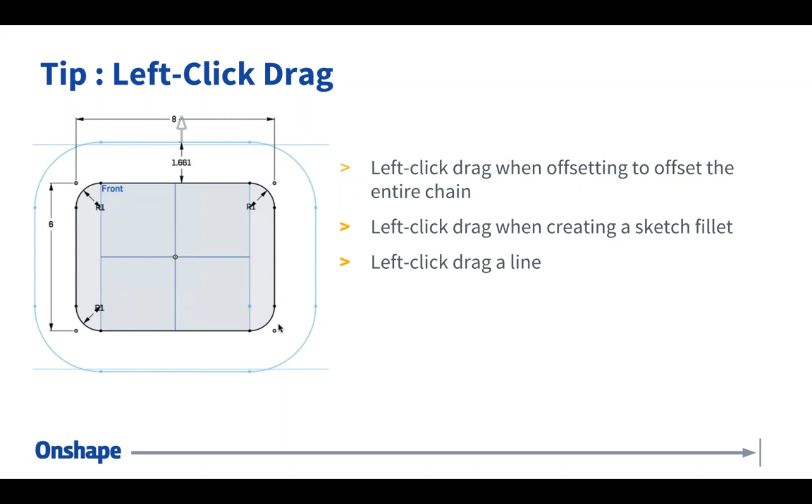So again, the left-click drag is a technique that you'll use in a few different commands. I'm going to show you an example of a few of them here. Let's jump out of this—I'm going to get into a document, and let's edit a sketch.

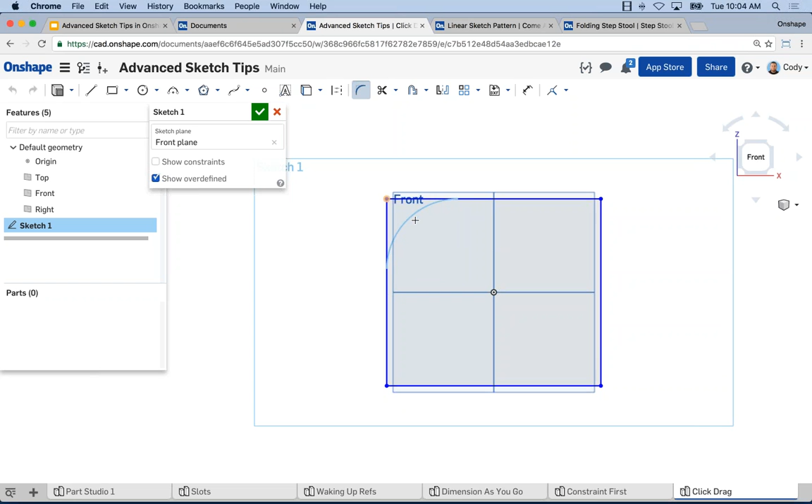One of the first things I want to mention is left-click drag as it applies to a sketch fillet. If I select the sketch fillet command from the toolbar, if you're familiar with sketch fillet, it's very easy—you can just left-click a point, enter a value for your radius, and it creates a sketch fillet. What a lot of users aren't aware of is that you can left-click drag a point and dynamically resize that sketch fillet. So instead of left-clicking the point, left-click drag the point, and you'll get a dynamically resizing fillet. It's a great way to get it close to the size you want, let go, and then enter a value—let's say 2. So then I can enter a value, and I have my sketch fillet.

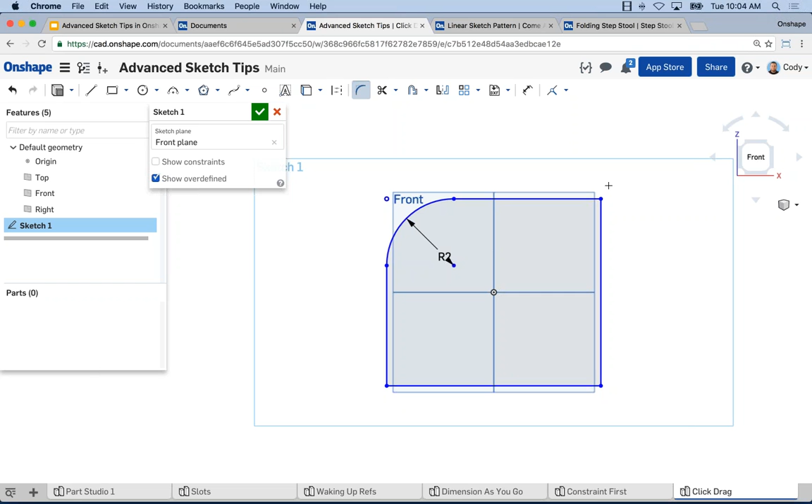The main tip here is instead of left-clicking the point, you left-click drag the point, and you get that dynamic resize. Now, another sketch fillet tip is that while in the sketch fillet command, after I've placed that first one, I can continue clicking on points, and it will continue adding fillets at that radius.

So it's very easy for me to add one radius, and then I know that all these other points also need fillets, and they're all the same size. I can just continue clicking points. It's easy for me to go in and add the fillets. They're all tied to each other, so if I change the dimension of one, they all update. But it's just a very convenient way of adding a lot of sketch fillets of the same size at once.

All right, so left-click drag is, again, the big tip. When you left-click drag a point, you get that dynamic resizing sketch fillet. Another example of this is left-click drag in the offset command. So let me take a moment to explain how this works. Let's say, for instance, I wanted to offset all of these lines and arcs, create an offset of the entire chain of sketch entities that I have here.

If I select offset and then just left click an individual piece of sketch geometry, I get an offset of just that one piece of sketch geometry. So it's useful if that's all I wanted, or maybe I just want one or two pieces of sketch geometry, I can offset just those individually. But what if I want dozens of lines and arcs that are all connected, and I want to offset them all at once? I don't want to left click each individual entity, or I don't want to window select or do any of those types of techniques.

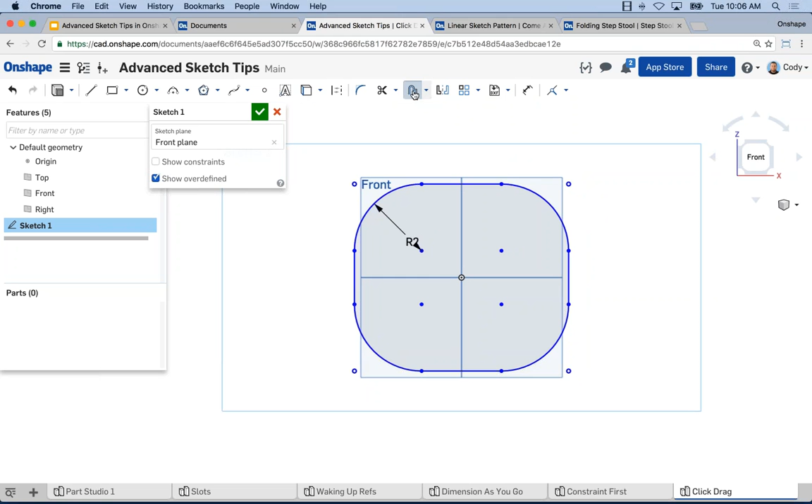What I'd recommend is left click drag. So there's another example where left click drag makes a big difference. So I select offset. I'm not going to just left click. I'm going to left click drag the entity, and it will automatically grab the entire chain of entities. Again, really useful if you have a lot of geometry that you want to offset at once.

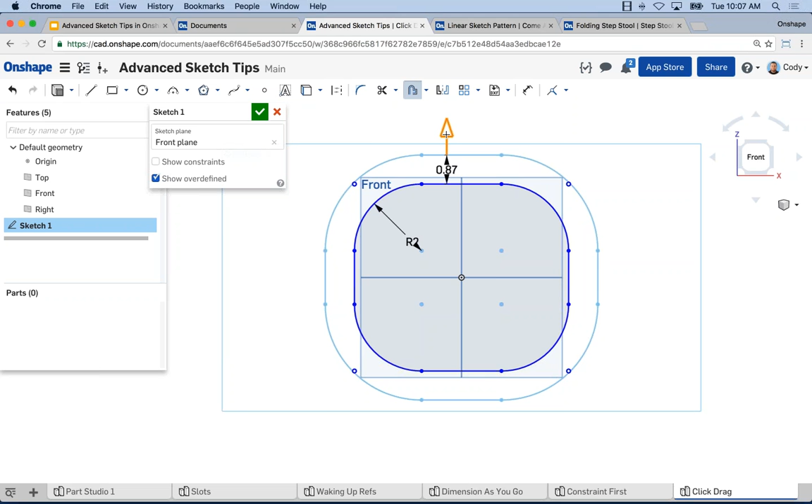You don't want to have to window select or left click individually the pieces. Just left click drag one piece and it will automatically grab everything that's connected. So again, left click drag. This is another example where it can be particularly useful in the offset command.

Now, the other thing that I mentioned is sketching a line. And this is a simple one, admittedly. So, for those users that have been around a long time, I'm sure you're familiar with it. But I do want to mention it just briefly. In the line command, if I select a line, if I left click and left click, I, of course, get a line. And by default, it assumes that I want to continue sketching lines.

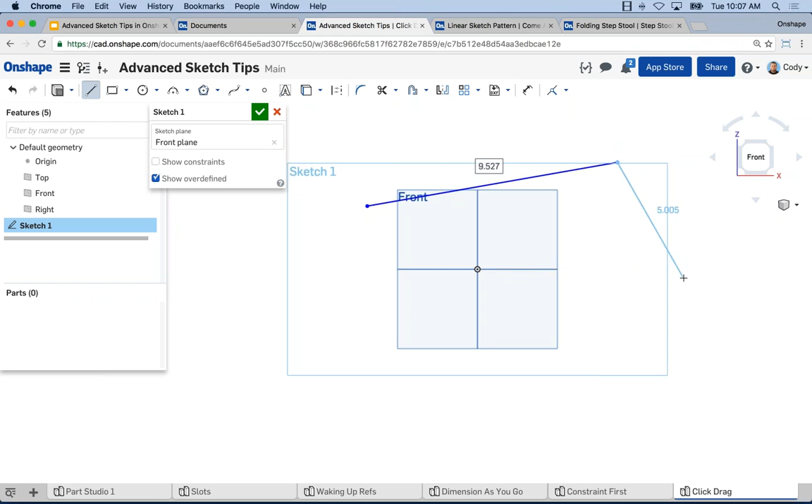And I'm sure users out there are familiar with this functionality. Once you've sketched a few lines, if you left click, it just continues with the line. It makes it easy for me to go on to the next one and to the next one and so on. So if I left click, just like I did, it assumes that I want to continue sketching lines. But what if I only want to sketch one line? And this is another example where left click drag is very useful.

So I select line. Rather than two left clicks, I left click, drag my mouse to where I want the line to end, and let go. Okay, so I'm using a left click drag to move the line out to its position. The benefit of this, and it all depends on the scenario, but it does not assume that you want to sketch another line. So if all you're trying to do is draw maybe just a series of single lines that are not connected to each other, this might be another technique that's useful. Okay, again, left click drag instead of two separate left clicks in the line command.

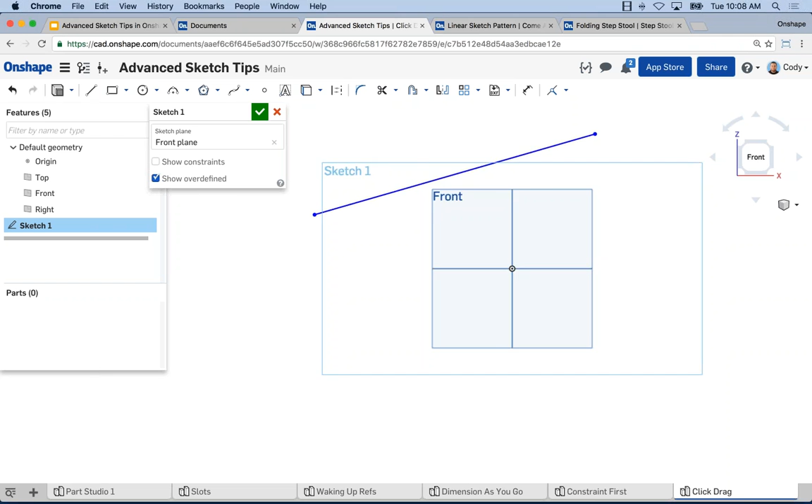All right, so that's my first tip, and that is left click drag. You can use it in the offset command, sketch fillet command. Dragging a line is another good example of it. So a very useful one. The next one on the list is linear patterns, and I don't want to discuss just linear patterns. We have other webinars that discuss patterns and sketch patterns in particular in greater detail.

What I do want to discuss is the flexibility of the linear pattern command, because I think it allows you to do a lot of things that users may not be immediately familiar with. So the thing I want to stress is you can create a pattern of sketch geometry very easily, but you can also edit that pattern very easily.

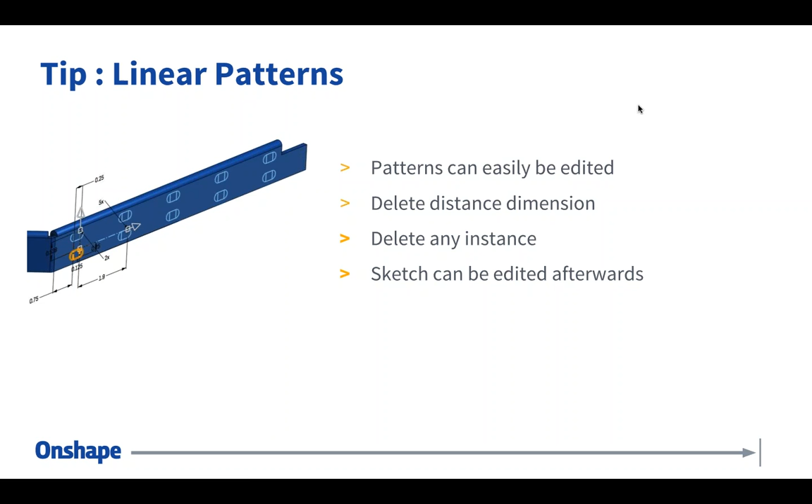And what I mean by that is you can delete instances within the pattern. You can delete the dimension that drives the pattern and redimension it to something else. And in all of these scenarios, the pattern remains intact. So you can think of the sketch pattern as creating all this geometry, but it's a very flexible pattern that can be modified later. So let me show you what I mean by this. Let me jump out of this and get into an example here.

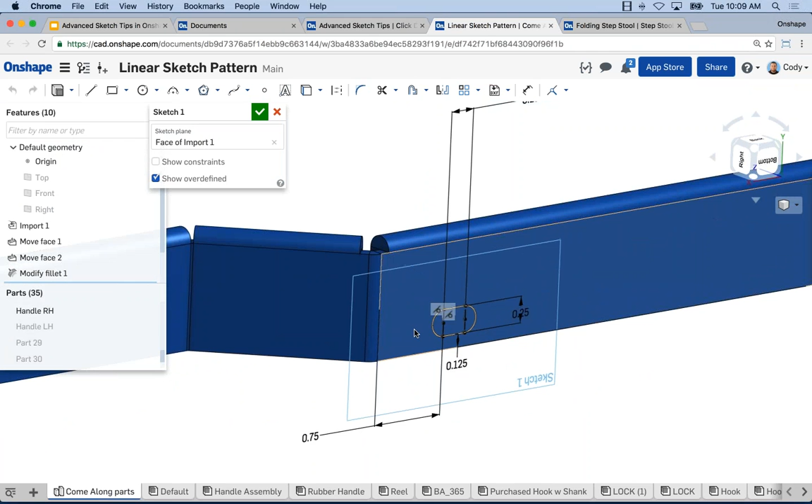So in this example, I have a simple arm to a part, and you can see I have this slot sketch, right? Sketch 1 here. You can see I have a simple slot feature. And what I'd like to do is create a linear pattern along the edge of the part here of this sketch geometry. Now, if you haven't created a linear pattern of sketch geometry before, it's very simple.

You click the linear pattern command in the toolbar, and you select the geometry that you want to pattern. So I just window selected that slot. And so you can see it now gives me my pattern. Here are my two pattern instances out here in space, and I have these arrows and manipulators that I can grab and drag. In my case, I want to pattern this direction, so we're going to grab the arrow and drag it the other way.

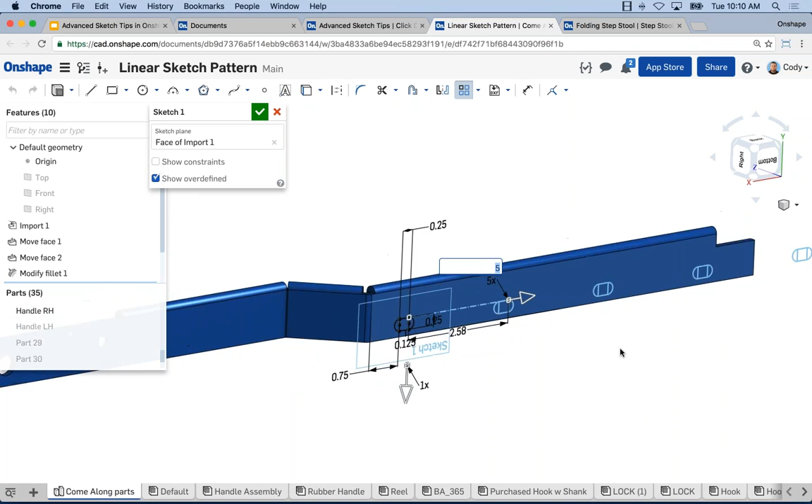And I actually want, let's say, 5 instances. Right, so I'm going to say 5x. I just double click the number. Now I have 5 instances of my pattern. Let's change the spacing a bit here. We'll pull this back a bit. There we go. And now I have 5 instances of my pattern, of my sketch geometry.

Now, the linear sketch pattern command can also go in 2 directions, so I can left click the other arrow, drag it, and you can see that will add a second direction to my pattern. And you can go multiple instances of this as well. You can see this is 2x, but I could easily go 3 and 4, whatever I want in terms of pattern geometry. So this is the second direction.

In this case, you have the same details. The distance between pattern instances is a dimension here, and the number of instances is a dimension, right? So just keep in mind, when you're doing this, you have all the same controls that you might get if you were to put these together manually. Now, one thing I want to stress, though, is once you've accepted it, it's not done. You can go back and change things.

One last thing before I forget. You can also move these squares. So say, for instance, I wanted the pattern to follow an edge that's not normal to a part. I can grab this and drag it up. Right, I can align this line with some reference, some other piece of the model, right? So I can create a relationship.

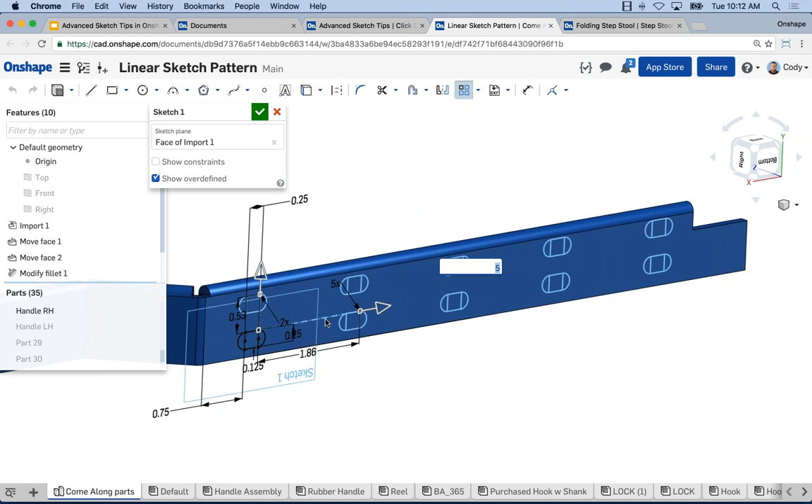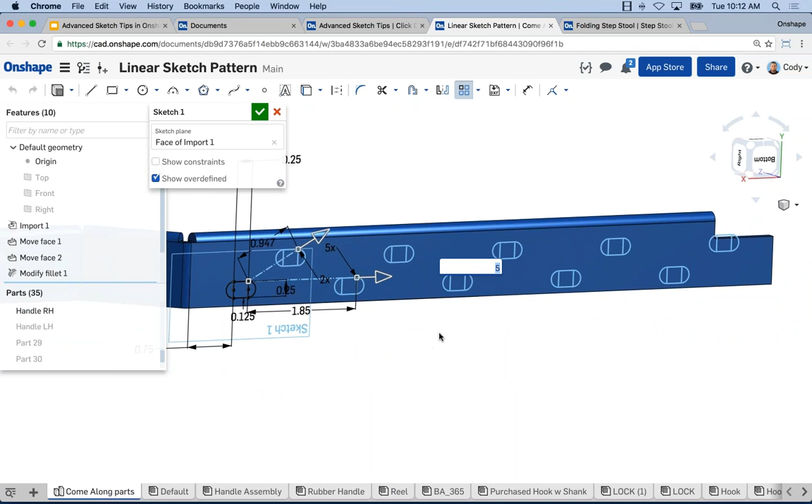Now, I think what most users will do is they will get the pattern close, like I've done here. It's not perfect. This needs to be perfectly horizontal, and so on. Maybe I want these evenly spaced between the 2 instances on top, something like that. But I know it's not done. The important thing is make sure to accept the pattern, right? You can use the Enter key to accomplish it, or the left click.

Again, left click the mouse. You can see the little visual cue there. Then you've accepted your pattern. But again, trying to drive this home, you can then change it any way you'd like. Right? Just because you've accepted the pattern doesn't mean that it's finished. And this means I can delete individual instances.

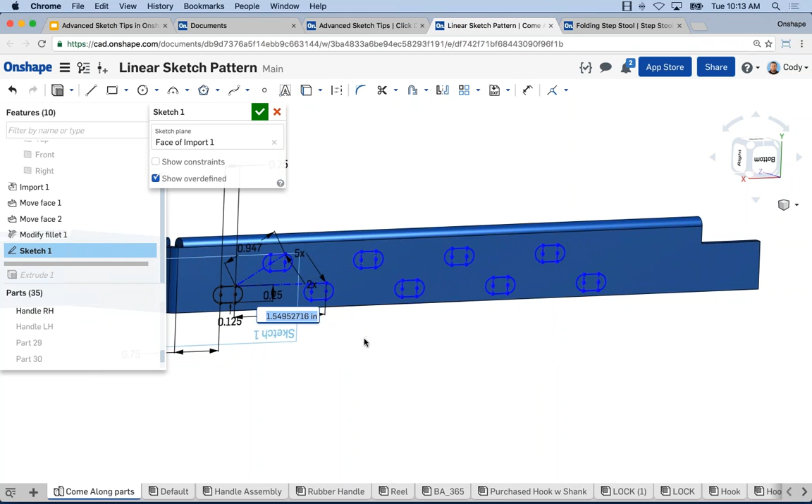I can window select this one in the corner and say delete that. Right? And now I've deleted one instance. It doesn't impact anything in the geometry. So if I change anything in the pattern, everything updates. So just keep in mind that deleting individual pattern instances doesn't have an impact. You can also change the construction lines that drive the geometry, right?

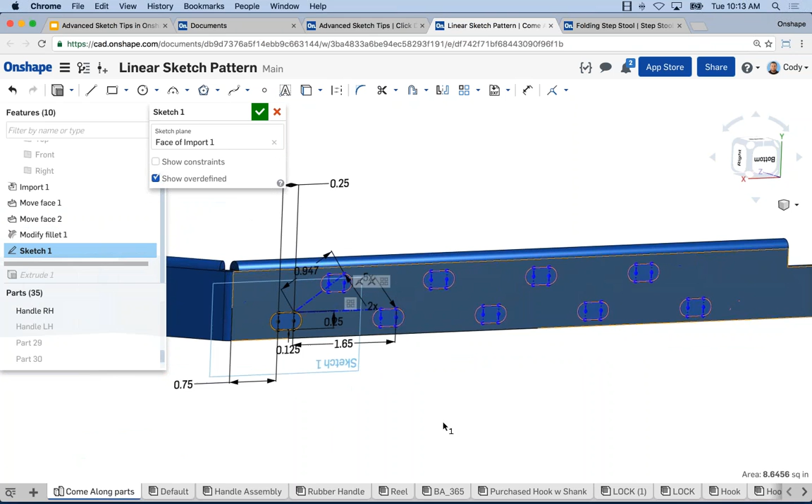So I can grab the end point of this line and move it, or add a dimension or constraint that ties it to something else. I can also make this edge, for instance, parallel with the line. Right? So that might be a great way to constrain my pattern.

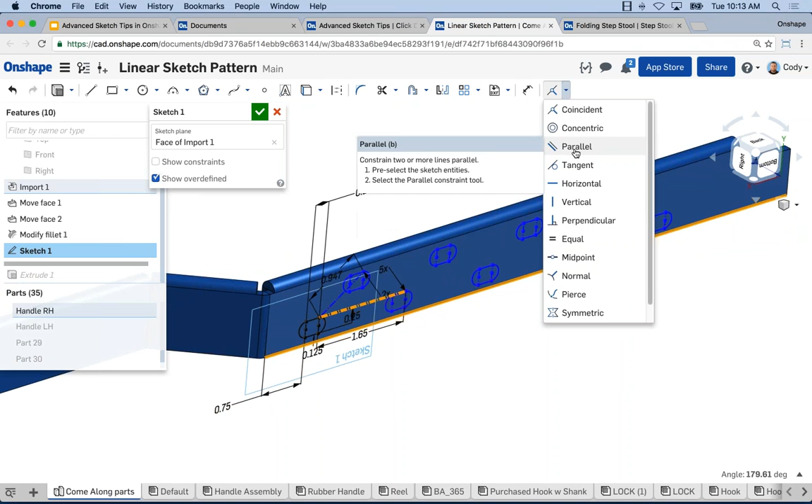Okay? So just keep in mind you have a lot of options when you talk about how patterns work. You can constrain it relative to other things. Essentially, it gives you the sketch geometry you need to then go in and make modifications. So now I've made this line parallel with the bottom edge, which means these slots are all parallel. And I can even come in and say, the pattern for this slot should be at a 35-degree angle, right? And so now I've fully defined my pattern.

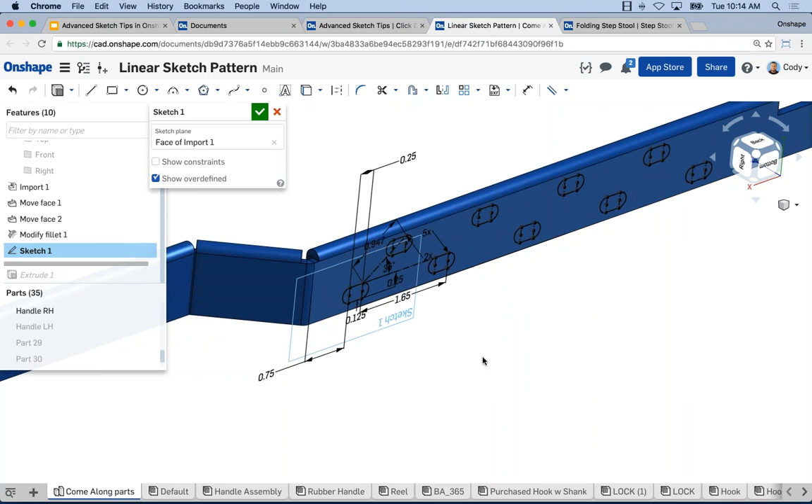Now, one other thing that I want to point out is that you don't have to drive a pattern by the distance between the individual instances. That's how it's going to default. So you'll notice I have a 1.65 dimension here, and I have another dimension for the distance, 0.947. This is how it will, by default, dimension, but you can change this. I can delete this dimension and dimension it from the edge, for example. And now, let's say 2.375.

Now, instead of being driven by a dumb value, so to speak, between the instances, just a static number, it's now driven by the length of this arm. So if I change the length of this arm, the pattern is going to behave in a little bit more intelligent manner than it otherwise would, right? Because now it's driven by the overall length rather than just some arbitrary number between instances.

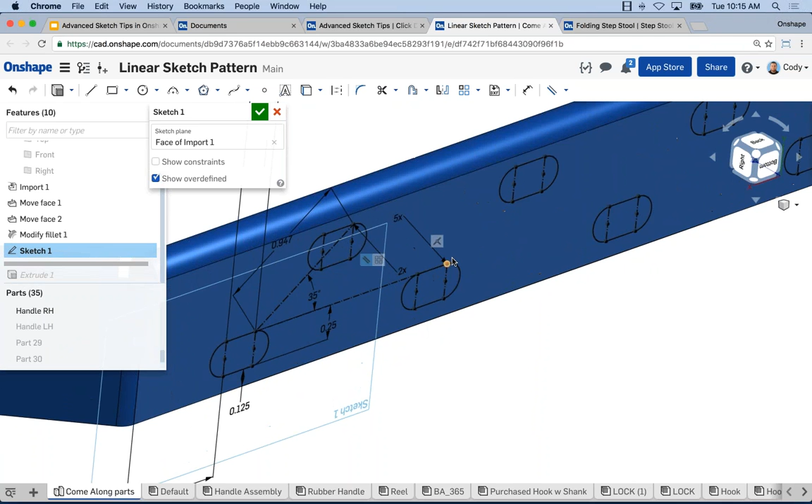So again, just driving home, you can delete the dimensions that drive the pattern. You can delete the individual instances of a pattern. You can dimension it just like normal sketch geometry. All those construction lines that are created can be defined just like normal sketch geometry after you've accepted the pattern. So again, the left click to accept the pattern is really kind of the first step, and then you go back and fully define things, especially in scenarios where you want the geometry to align with an edge of the part. You're going to need to constrain this line to something on your part in that example.

All right, so enough on this. I just want to drive home again the linear pattern command. I think that you may have exposure to it, but just realize it has a lot more capability than a lot of users are aware of.

All right, so I see a few questions. Was your arm made with Onshape's beta sheet metal tools? Somebody had to ask. No comment. I will say we are very, very close on sheet metal. So if you're interested in sheet metal, stay tuned.

Are there any plans for construction history for sketches, similar to construction history for parts? Of course, editing a sketch is a step in the history, but it's not individual pieces. I'm not aware of any plans to make it more granular than edit a sketch and change it. I don't know that you're going to see insert line, rectangle, those types of steps at that granular of a level.

Does a slot have a center feature to select? Usually I need to center the slot in 2 dimensions and then need to recalculate from the center radius. I'm fairly certain the answer is going to be no. I'm going to cover slots in just a second, but I think in your example, it's using some other geometry to reference for a slot. So give me a moment, and maybe I'll answer your question when I cover slots.

Can you replace the angle dimension in the pattern with an XY offset? Absolutely. Yeah, that's just a preference in how you like to dimension. Sure. How would you do a cutout on a cylinder? A few different ways. Create a plane in the middle of the cylinder and cut from the middle. It depends on the scenario.

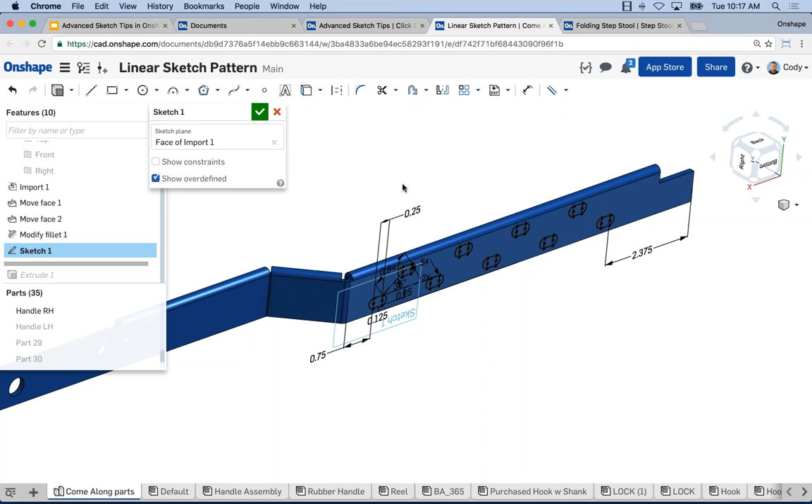Can patterns be dynamic? As the part length increases or decreases, can pattern instances increase or decrease? And the answer is yes, but it requires some thought. And what I mean by that is there's an example of it. If you do a lot of this, I want the number of pattern instances to dynamically increase based on the length of a part, and I want that to be automatic.

What I'd recommend is on the FeatureScript page, onshape.com/featurescript, there is a feature. Forgive me, it's been a while since I've looked this up, so I'm going to have to remember. I forget now which one it is.

But there is a feature here that will recognize the distance between them and automatically increment. Measure distance. This is the one. So definitely check out the measure distance. There's an example of it working there.

You can copy it. It's a public open document. But measure distance would do what you're looking for in a smart way. It would allow you to intelligently update the number of instances based on the length of a part, for example. Okay.

In this example, the example I was giving you a moment ago, the sketch pattern example, I can drive it by the overall length, of course, but I can't say, if it's this, then set the instance count to this. The spacing would change, but not the instance count. Is there a way to get the instance count to be driven? First and last instances are defined by the dimension, and in between it changes instance count.

The first thing I would try there, and forgive me, I haven't personally tried this, but a variable. I haven't tried driving a linear pattern instance count by a variable. That would be the first thing that I would try. And then you'd have to establish that the variable itself is driven by maybe the length of the part or whatever factors that you may have. But that would be my first guess, first thing I would go for.

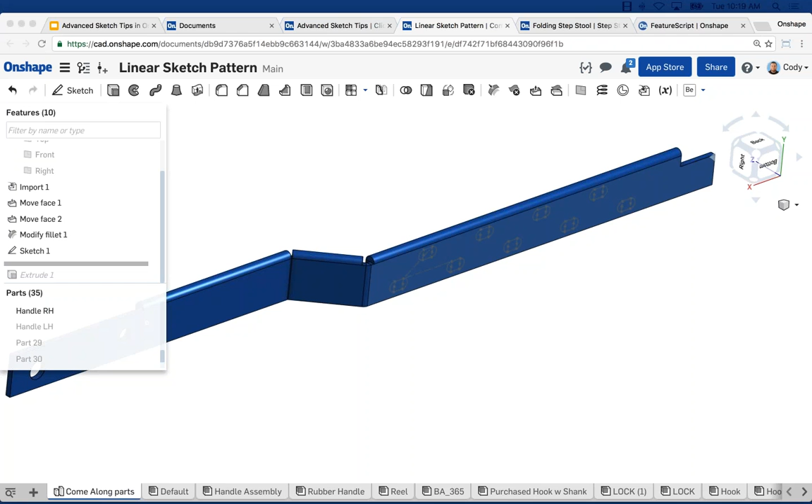All right, moving on. The next tip that I have for you is select constraint first. And this one's a big one if you find yourself adding a lot of the same constraints over and over again. So let's say that I have this sketch and I need to add 5 tangent constraints, and what a lot of users will do is they'll select the geometry, and then click tangent. Geometry, then click tangent. And so you end up clicking tangent 5 times every time that you create a constraint.

So if you know that you're going to create a lot of the same constraint over and over again, a big tip that I have is you can click the constraint first, then click the entities that you want to constrain. And this just means you don't have to go back to the toolbar every time. The command will remain active until you get out of it, until you click the command again or hit the escape key. So the big thing is it's very useful if you create a lot of the same constraint back to back, because you don't have to go back and forth.

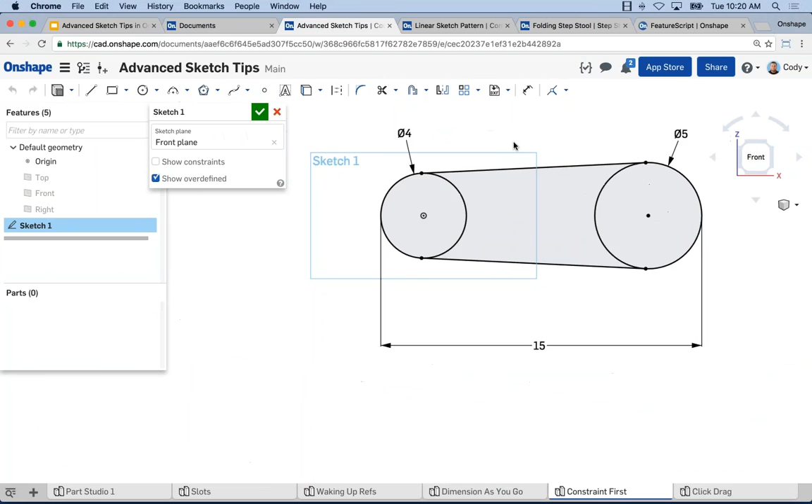So let me give you a simple example of this. Let's say I had a situation like this one. And in this situation, I have, actually, you know what? This is defined. Let's create something real simple, right? So I have two circles and I have two lines that join them. And what I really want from these two lines is I want tangent. I want all of them to be tangent.

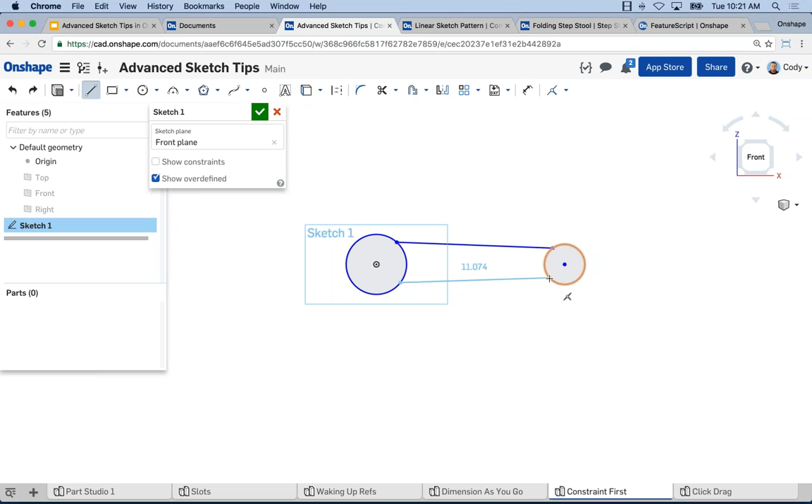Now, if you're particularly careful, you can actually create the tangency as you're sketching, but let's just say that you haven't and you need to create a tangent constraint between all four transitions, right? Four different tangencies between circle and line, all 4 points need to be tangent. What a lot of users will do is they will left click, select tangent from the toolbar, left click, select tangent, left click, select tangent. So I'm going back and forth to the toolbar.

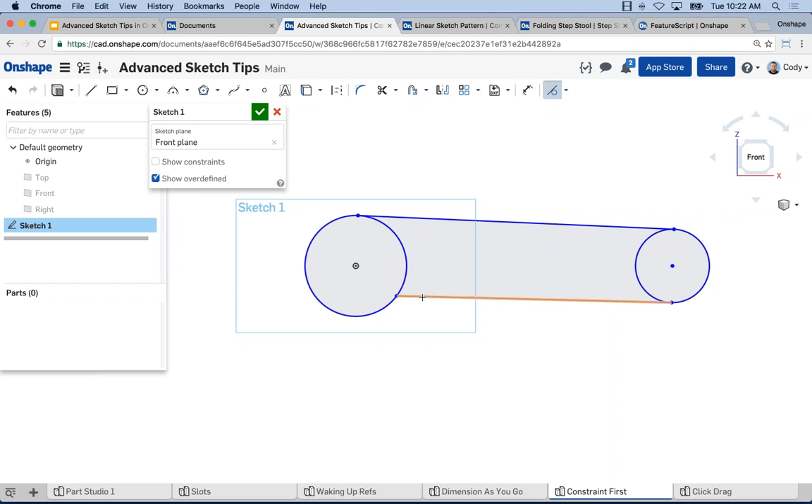So the big tip that I have is click the command first, then click on the entities that you want to constrain. So now I have the tangent command active. Now I can go line, circle, line, circle, line, circle, line, circle. And now I have 4 tangent constraints without having to go back to the toolbar every time to select it. So just keep in mind, it's a big time saver if you find yourself having to do it a lot.

And I think for a lot of users, if you do lay out all of your sketch entities all at once and then come back and add all your constraints at once, this is a very valid tip. You'll find yourself having to go back and forth a lot.

Question, can you do angular patterns? Yes, we refer to them as circular patterns. You can do circular patterns in Onshape.

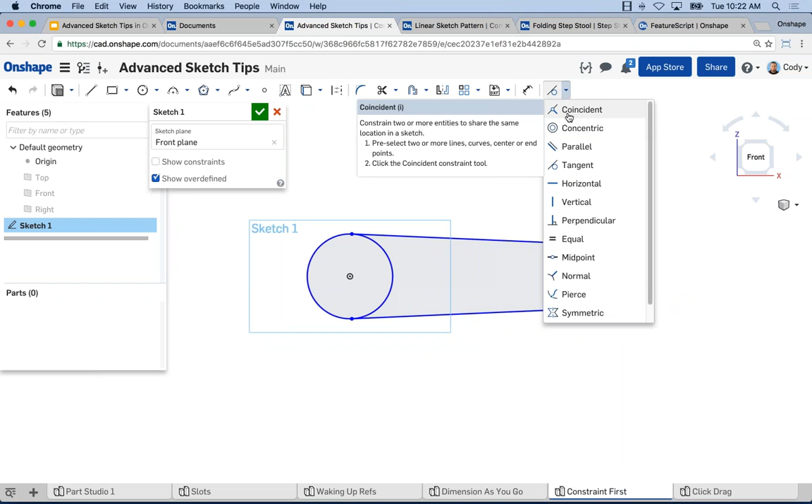All right, so that is my next tip, and that is just selecting your constraint first. And it's not specific to tangent, of course. Any constraint, you can click on it first and then select the entities that you want to constrain. It's a little bit different than what a lot of users do, but I think if you're doing them back to back, it becomes very valuable.

The other tip is remember that you're in that command until you escape out of it or click on it again. So it will assume that anything that you click on from that point forward, you're trying to make that constraint. All right, so that is one that will save you some time when creating constraints. Let's move on to the next one.

Now, the next tip, I think, has been around in CAD a long, long time. So this is not a new thing by any stretch of the imagination, but it's a commonly asked question, especially by the more heavy sketching users out there. And that is, how does window select work? When I have a lot of sketch geometry, does it make a difference if I go from right to left or left to right? And this is something that carries over from a lot of CAD applications.

So if you're not familiar with what I'm referring to, I'll explain it in a second. But if you've come from AutoCAD or SolidWorks or one of those kinds of CAD applications, this is a familiar concept. When you're in a sketch and you need to select a lot of things at once, I don't want to left-click individually lines. I want to window select maybe a dozen lines and arcs without having to left-click individually. That's where window select comes in.

It's essentially a left-click drag. So you left-click drag your cursor over the sketch geometry that you want to highlight. The difference comes in when we talk about the direction that you drag. So a right to left drag, if you drag your cursor from right to left, anything touching the window that you create is selected. Now, if you drag from left to right, anything fully encompassed within that window is selected.

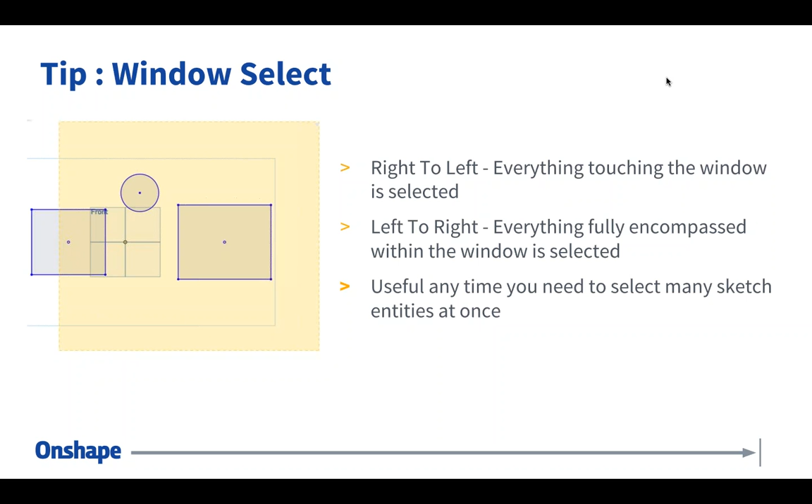Okay. So to give you a simple demo of this, let me jump back in real quickly here to this document. Let's jump into this sketch. And so really all I have here is a circle and a few rectangles. And if I window select, let's do a right to left. I'm just going to left click, drag a window, and I let go. Notice that it selects anything touching it, including these lines. And I didn't fully encompass those lines. It was just simply touching it.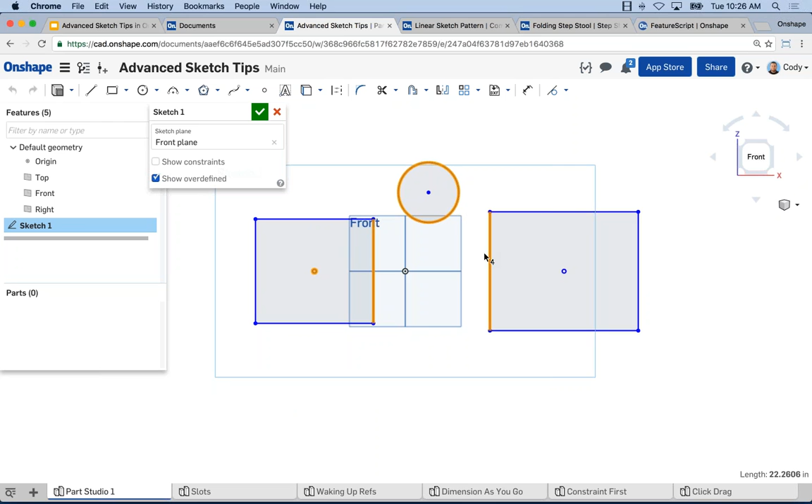However, if I go from left to right, it will only give me what's fully encompassed within that window. So you'll notice some of the lines stuck outside of the window, therefore they aren't highlighted or selected when I went from left to right. So again, right to left or left to right, you will get different behavior. Okay. All right, so that's my next tip, window select. If you're not familiar with it, window select is just a fast way to select a lot of sketch entities without having to individually select them.

If a pattern is used in multiple instances on different planes, can the holes be made into a part and used in each situation? Yeah, sure. You can absolutely create a hole that's a part and then just do a subtract if that's your technique. We actually have a dedicated hole command and a dedicated beams command for steel detailing. But yeah, that is a technique you could use if you chose to. Absolutely.

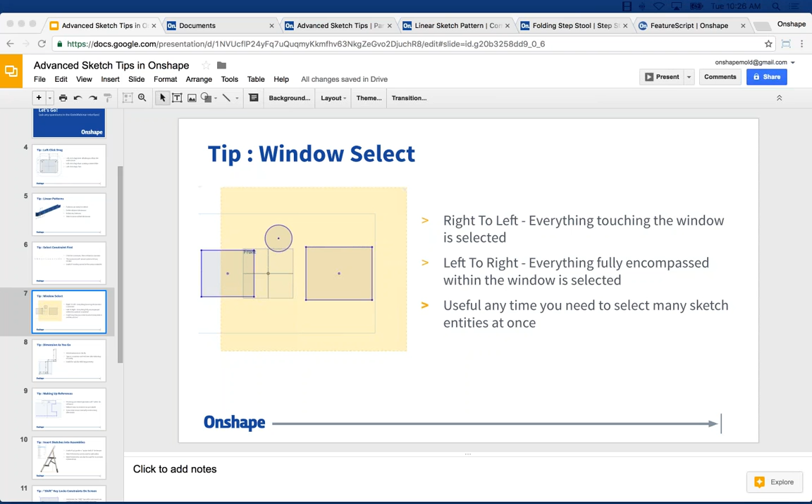Next tip in my list. Let's jump into it. Dimension as you go.

As the name implies, this ability allows you to add dimensions on the fly. Now, it's not going to fully define your sketch in more complex scenarios, but it's a way to speed things up. This is only for those that like the approach, but it's a very fast way of adding a lot of dimensions quickly. It applies to just about any kind of sized geometry—lines, arcs, circles, rectangles—any scenario where you have a size for your geometry, you can enter a value as you're sketching.

I think that's the key thing. A lot of users are aware of: sketch my geometry, click the dimension command, come back and click on my geometry to add a dimension. But if you can add a dimension on the fly, you save yourself that going back and forth. Essentially, you're adding a dimension as you sketch. So if I sketch a line, a circle, or an arc, immediately after placing that geometry, if you type in a number and hit enter, it will automatically dimension that geometry.

It happens automatically as you're sketching. So if I sketch a line, then type in a number and hit enter, I've sketched a line and dimensioned the length of that line. Okay, so it's a big advantage. Of course, it's not going to give you a fully defined sketch in every scenario, but it will allow you to quickly define the size of things as you're sketching.

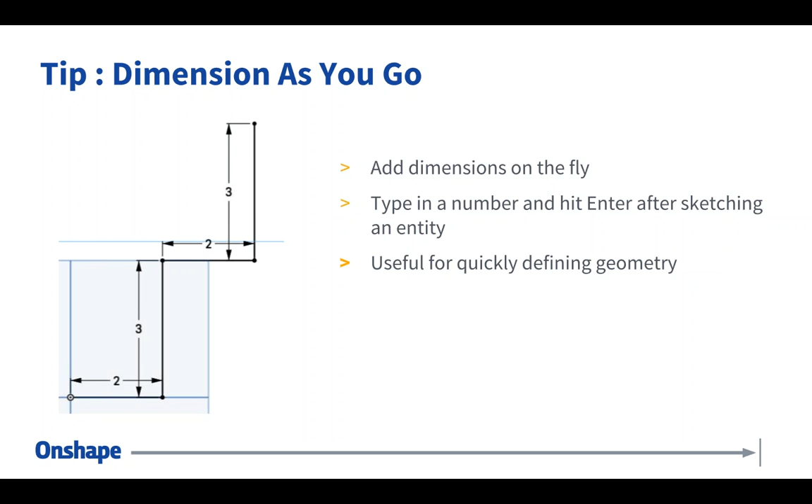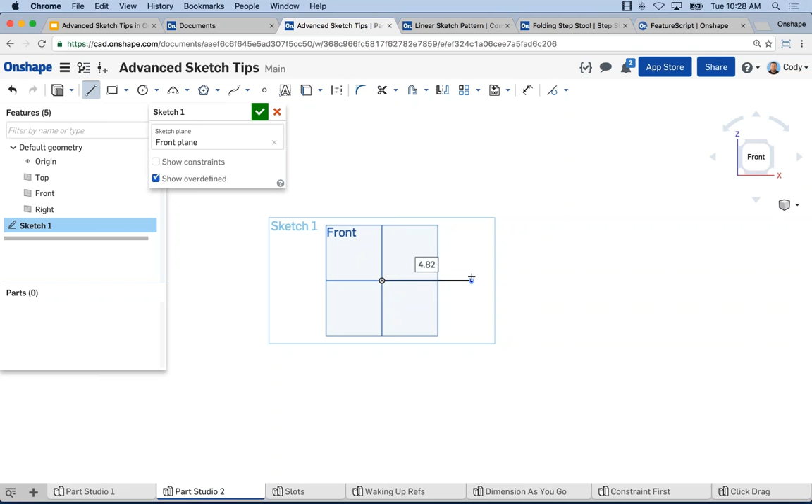So to give you a quick demo of this, bear with me for a second here. Let me start a new tab, new Part Studio, and I'll start sketching. Now, the key again is as you're sketching. If I click on line, for instance, and sketch a line with a left click, the moment I place the line, I can enter a value. So I'll type 5, enter, and now I've added a distance dimension for the length of that line.

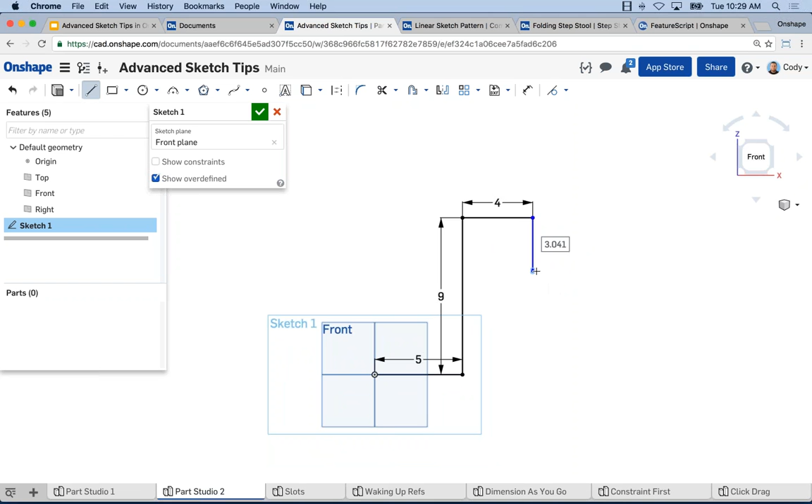And I can keep sketching, so I'm still in the line command. I can say 9, enter, and just keep going—4, enter. I'm adding these dimensions on the fly as I'm sketching the geometry. And it applies to any geometry. So let's say I want a circle, 3, enter, and now I have a dimension for the size of that circle.

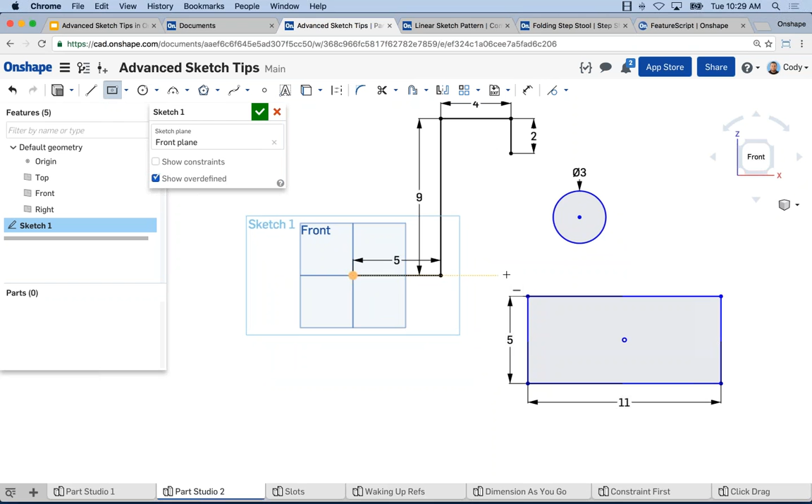Keep in mind, I should also mention rectangles. In the case of a rectangle, you have two dimensions. So as soon as you place a rectangle, let's say I want 11 by 5—11, enter, 5, enter—and now I've added dimensions to give that rectangle a size. Again, the key here is dimension as you go, and you can do this for arcs, ellipses, rectangles, and lines. Really useful as a fast way of adding dimensions without having to go back and forth with the dimension command.

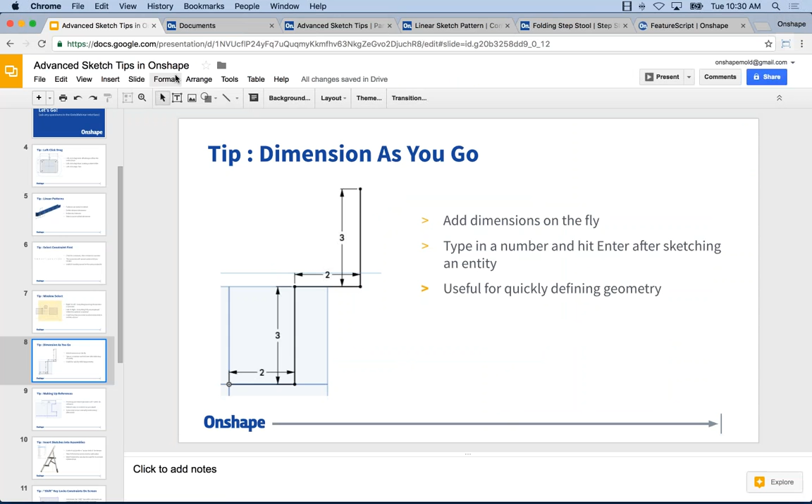Okay, so moving on, the next tip in my list is waking up references. This is definitely a preferred one.

Question: Is there a way to automatically trace the edges of an imported graphic instead of taking the time to create a sketch over the imported picture? No. Today, as you mentioned, you need to import the picture into a sketch and trace over that geometry. So there's not a faster way currently.

Question: Are rectangles in Onshape groups of lines and not a single entity? That is correct, and that's a deliberate decision, so that you could easily sketch a rectangle, delete a piece of it, and still have all the geometry and references in place, the constraints in place. It's worth pointing out that when you create a rectangle, you're really just creating four lines with a certain relationship to one another. That's deliberate so you could go in and delete a piece of it without breaking all of it.

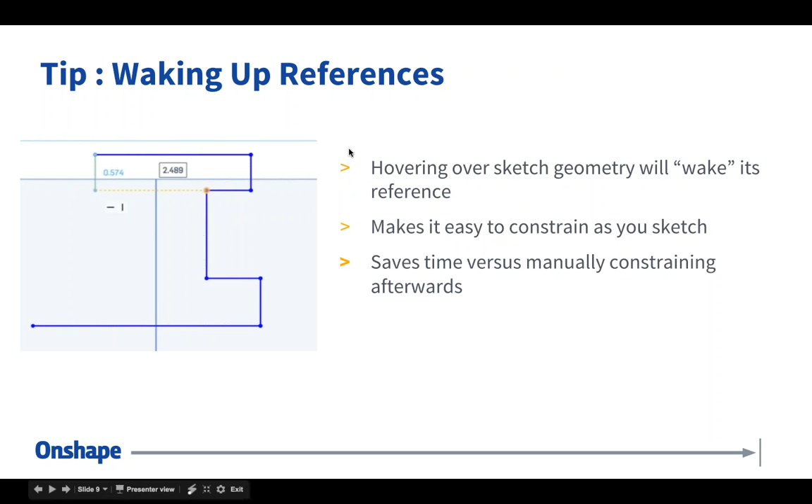So this is a big one if you are doing a lot of more complex sketches where you find yourself constantly needing to add relationships to other pieces of the sketch. Let me give you an example of this.

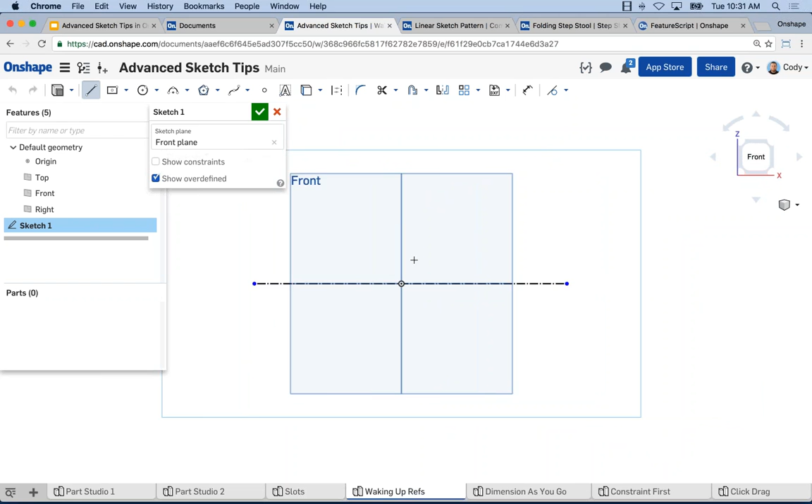So in this simple revolve profile that I want to construct, as I'm sketching geometry, you'll get references to other things automatically pop up. So this is vertical. I can have horizontal. I can even get things like perpendicular. But what you'll run into is there'll be scenarios where you need to create a constraint to other things.

For instance, I want to create a constraint now to that point over here on the right. But you can see as I move my line down, it's not popping up. So some inferences are automatic. They're going to pop up just as you sketch over the origin and things like that. But there will be scenarios like this one where I want to reference that point, but it's not popping up.

How do I wake it up? This is a term I refer to as waking up the reference. And the answer to that is you move your cursor over that point, stay there for just a moment, then move your cursor back, and what you'll notice is that inference will then appear.

And you can do this with anything. I can do it with midpoints. I can do it with a whole bunch of things. So it becomes a very useful way to go in and add constraints.

Here's another example. I want this to be horizontal to the one on the right. I'll move my cursor over that point, wake up that reference, and now I have my horizontal inference. The big thing it saves you here is just not having to come back and add these constraints manually later on. So here I can see another reference that I need to this point, move over it, move up, and now I have those inferences in place.

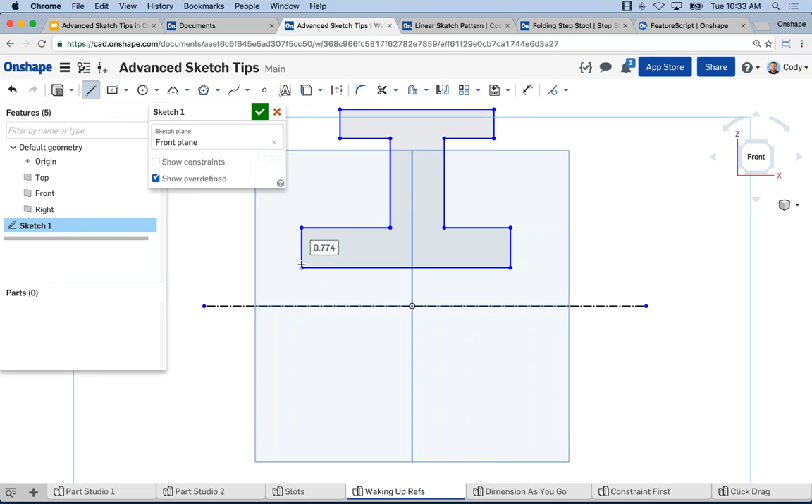Now, another example of this that I often like to show, let me give you a simple example of it, but you can imagine a number of different scenarios. Let's say that I had like a corner rectangle, and I want to reference the center point. Now, of course, we have a center point rectangle, but imagine any scenario you had where you wanted to reference the center of 2 points and maybe add a point between them.

In this example, let's say that I want to add a point. I can select point, move my cursor along these lines until that midpoint wakes up. You can see it there. If I move it over here, you can see it there. Now I've woken up both midpoints. And now I can easily constrain to those 2 points. Left click, and now I've placed a point right on the exact center.

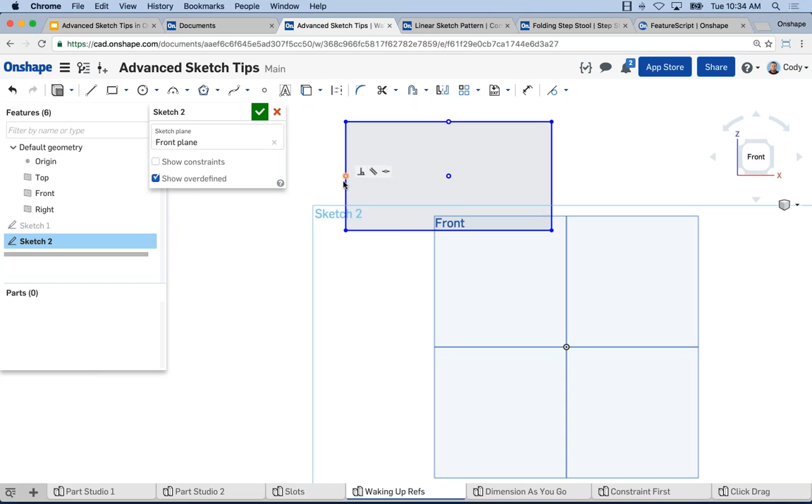So again, the key thing to keep in mind, you can wake up other geometry just by moving your cursor over it, hovering over it for a second will wake it up, and it's useful when you need to constrain to it later.

And it's useful in a number of different scenarios, whether you're trying to sketch geometry like lines, like I was doing a second ago, or maybe I'm just trying to center one circle on another, or trying to find the center of 2 edges. All of those examples, you don't have to sketch geometry and then manually add constraints. You can wake up the references and create the constraints as you're sketching. And I think that's the big tip.

Question: how does Onshape show overdefined? Anything immediately overdefined will show up as red flags in the sketch geometry. So as soon as you have something overdefined, a red flag will appear for that overdefined constraint.

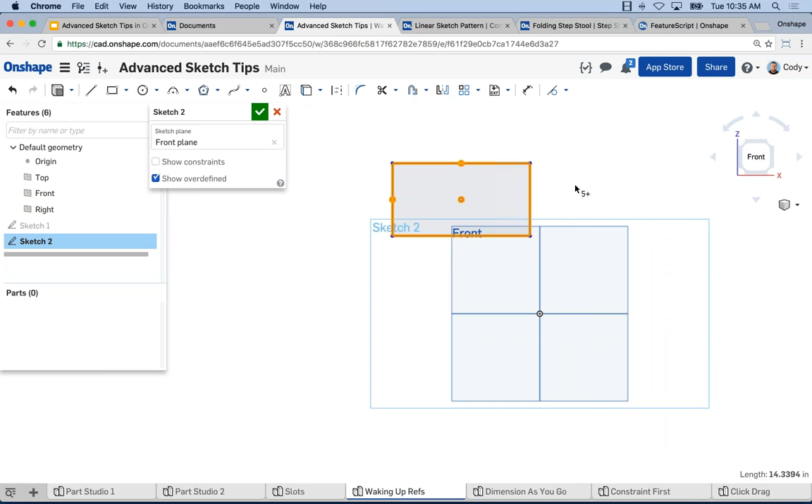Wake up may help with my question about the center of a slot. Yes, and the center of an arc is another good example where you might use wake up. So again, keep in mind, waking up references, you can wake up just about anything and use it and not have to constrain it manually later. I think that's the main thing.

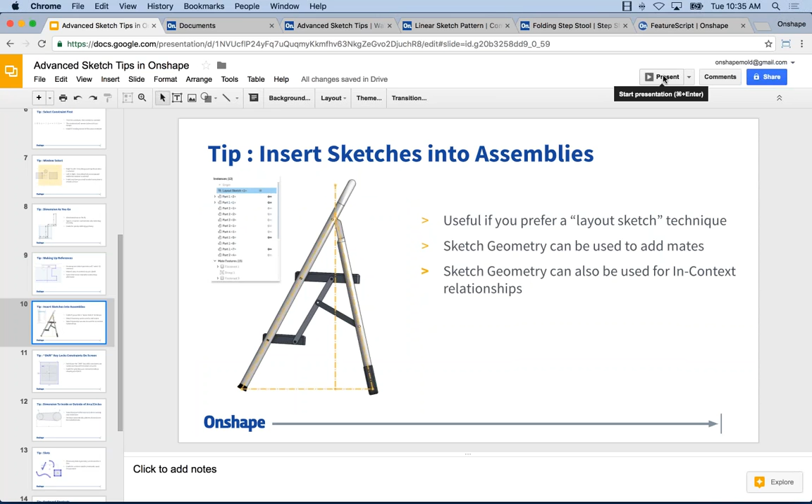All right, so moving on. Next tip that I have, and I don't really have a big example for this, but I just want to stress it because it often comes up. You can insert sketches into assemblies.

A lot of users ask this because they like the ability to lay out a sketch or lay out an assembly based on a sketch.

It's a commonly asked question: can I insert a sketch and then start mating my parts to that sketch and use it as a way to drive everything? The answer is yes. You can insert a sketch into an assembly, mate parts to sketch geometry, and also use in-context relationships, which we just announced, to build off of it. I can literally modify parts based on a layout sketch and have the layout sketch drive not just the location of parts, but the size of the geometry as well.

There's a lot of potential here, a lot of stuff I don't really have time to get into detail on, but I want to mention it's possible. At the assembly level, you can have sketches, insert sketches, mate to them, and use them to drive geometry in the form of in-context relationships. All kinds of cool stuff is possible when we talk about sketches and assemblies. So if you're familiar with this technique, or interested in having a sketch drive assembly position, parts, or even size, definitely consider it.

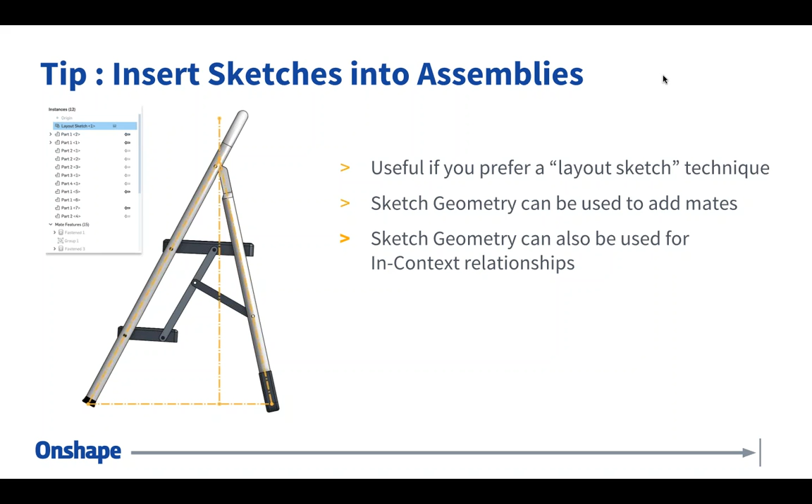By the way, I should mention it's just an option. When you go to insert, you'll see a little icon for sketches, and if you click it, you'll be able to select a sketch and insert it into your assembly. So moving on, that's inserting sketches into the assembly.

Now the next one I want to mention is the Shift key, and this is a popular keyboard shortcut for the heavy user, oftentimes because showing all the constraints can really be cumbersome. If you know what I'm referring to, in a sketch, if you check show all constraints, it's going to add every constraint, and if you have dozens, even hundreds, that can be a lot of stuff on the screen. A more seasoned user will recognize, hey, I can mouse over an individual piece and see the constraints for just that piece.

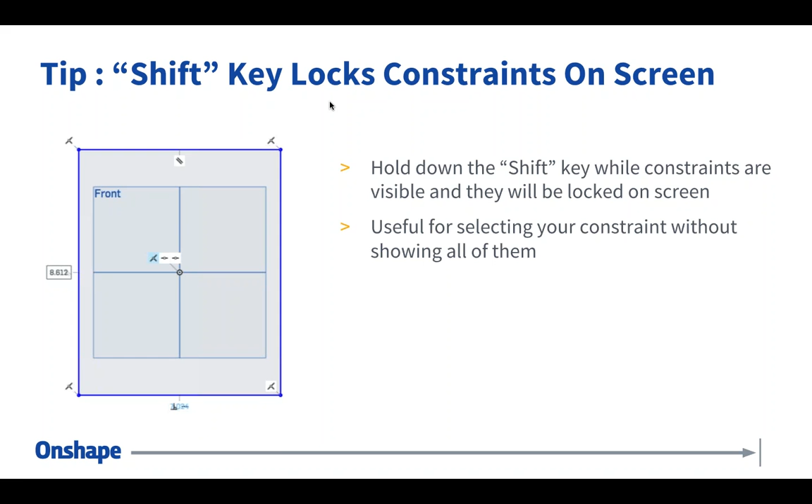The problem becomes when I try to mouse over the actual constraint icon. Sometimes if you move your cursor in just the right way, the icon disappears and you struggle to click on it. So the tip is hold down the Shift key and it will lock all the constraints on the screen.

So I mentioned before, and this is just to illustrate, a rectangle is really just a series of lines. If you check show constraints, you can see all the constraints created by just creating a center point rectangle. There's parallel constraints between these two lines, parallel between these, and coincident constraints to tie the endpoints together. If I wanted a different shape, I could easily break these.

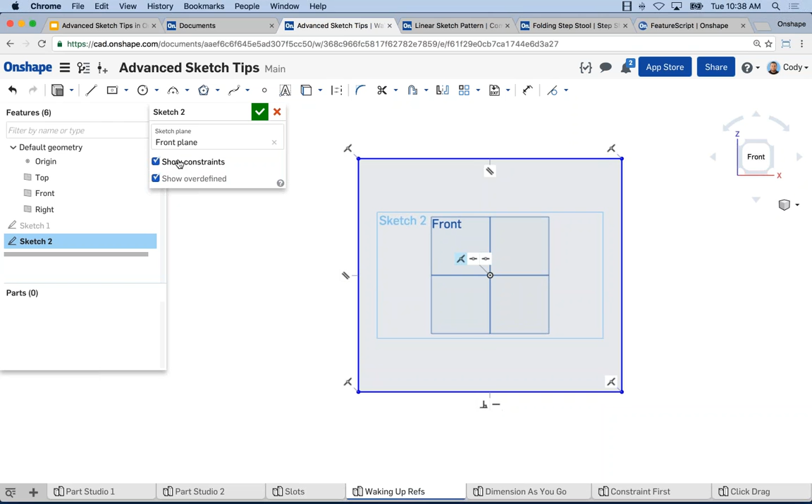I have a horizontal constraint, so if I wanted a rectangle at an angle, I could easily just delete this and drag that up. My point is there will be scenarios where this is too much, where if I check show constraints, there's just too much stuff on the screen and it makes it hard to find what I'm looking for.

As you move your cursor over, you'll see the constraint icons appear, but sometimes they can be difficult to select. So the tip is, if you move your cursor over and hold the Shift key down as soon as you see those icons, it locks them on the screen no matter where you move the cursor. I can move the cursor way over here and they're still there. The big thing is they don't disappear immediately. They stay on the screen longer, allowing you to click on them. So again, the tip: use the Shift key when mousing over geometry to lock those icons on the screen, making it easy to click on them.

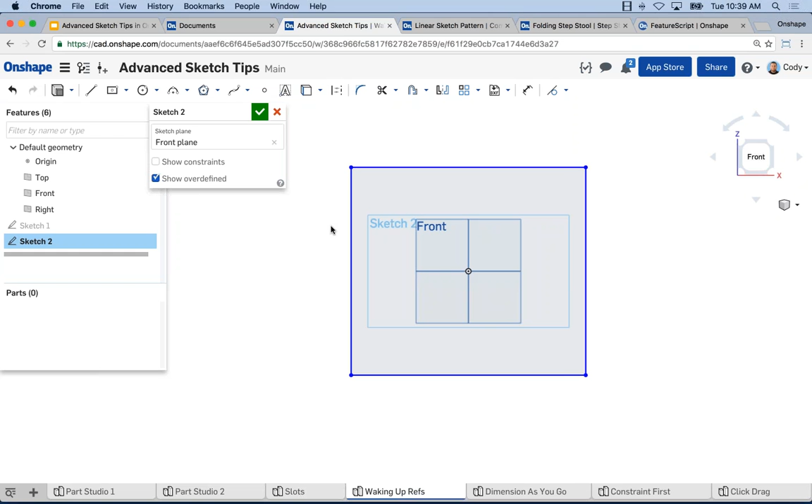A simple example like this may not be as relevant, but imagine you had dozens of lines and arcs. It can be difficult to find the exact one you're looking for, and often show constraints can even confuse things when you have a lot of constraints.

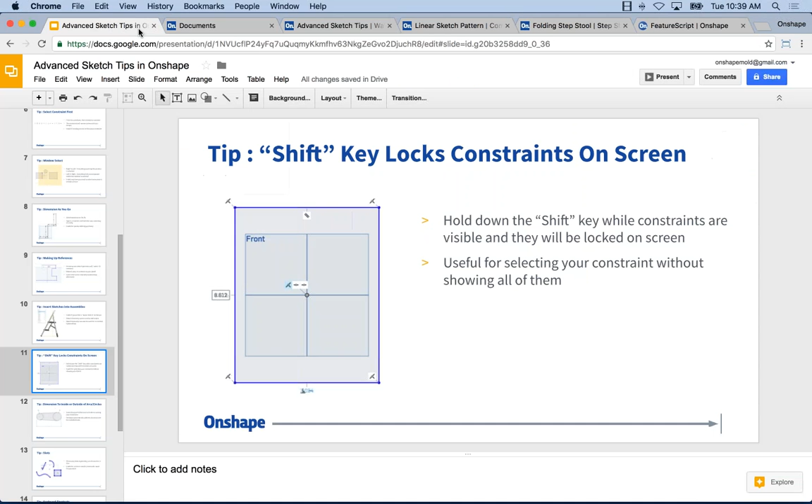All right, moving on, the next one in my list, and this is another commonly asked question: what about dimensioning to the inside or the outside of an arc or a circle?

If I click on the center points, obviously I get a dimension to the center points, but how do I dimension to the outside of the arc in Onshape or to the inside of the arc? And the answer is actually pretty simple. You click on that part of the arc when you're creating a dimension.

So if I wanted a dimension from the outside edge of two arcs, I would click on the farthest extent of that circle that I could, and then click on the other farthest extent of the circle, and that would give me a dimension from the outsides. If I want a dimension from the insides, I would click on the closest point that I could, and I'll show you what I mean by this.

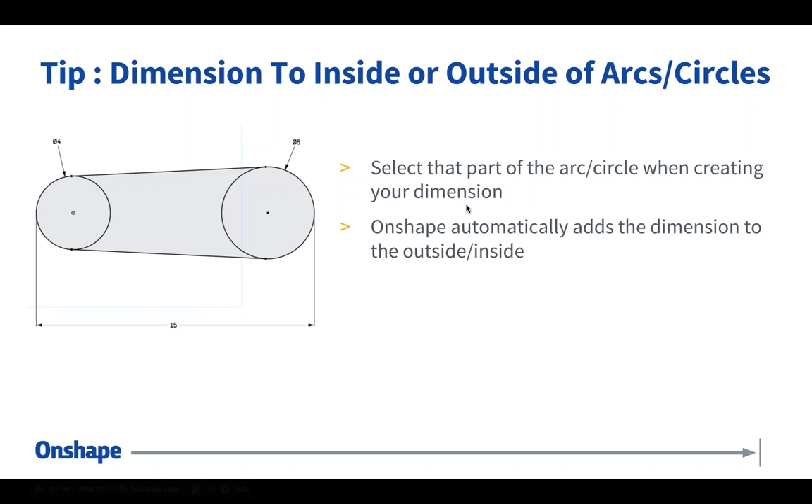The tip is you can do it. It works just fine for the inside or outside of arcs or circles, and it's just a matter of clicking on that part of the arc when you're creating your dimension. So let's do this. Let's add a few circles here. Okay. And what I'd like to do is, of course, add a dimension between those two circles.

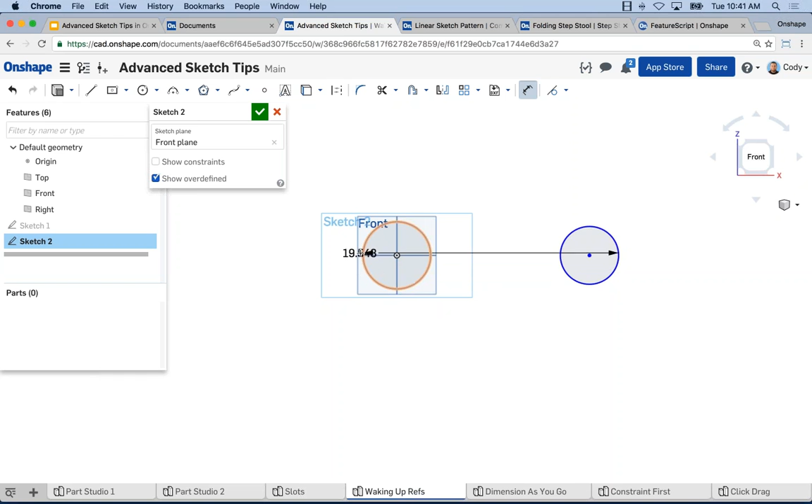Now, if I click center point to center point, I get a dimension between the two center points, of course, which is what a lot of users are looking for. But the question then becomes, well, what if I want from outside to outside? And I can left click the outside, left click the outside, and now I get a dimension from the outside. Notice that I clicked on the outside of those circles when creating the dimension. So that's a key part of it.

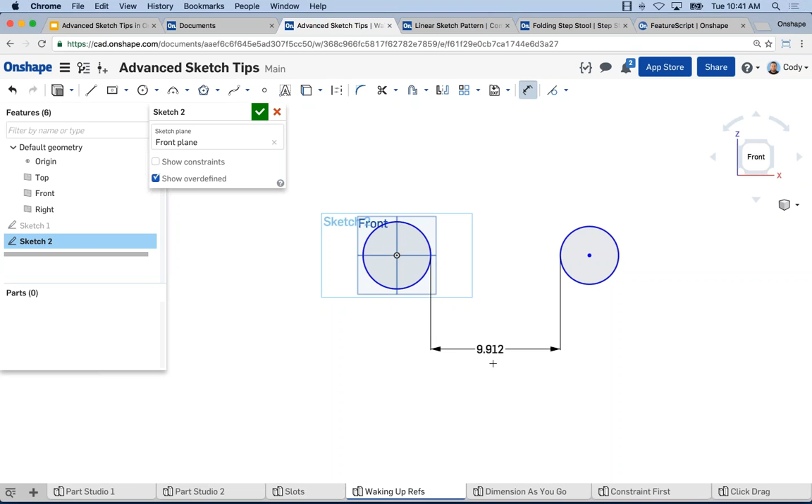It recognizes where on the circle you clicked. And that also means if you want on the inside, it'd be inside to inside, you get an inside dimension. And this applies to arcs just the same as it is to these circles that I'm sketching. But the key thing is it recognizes where on the geometry that you clicked, and it will give you a dimension from the closest point that makes sense, right? The inside or the outside.

So a big tip, especially if you do a lot of dimensioning, and a lot of users that do this like the ability to dimension to the outside of the arc or the inside.

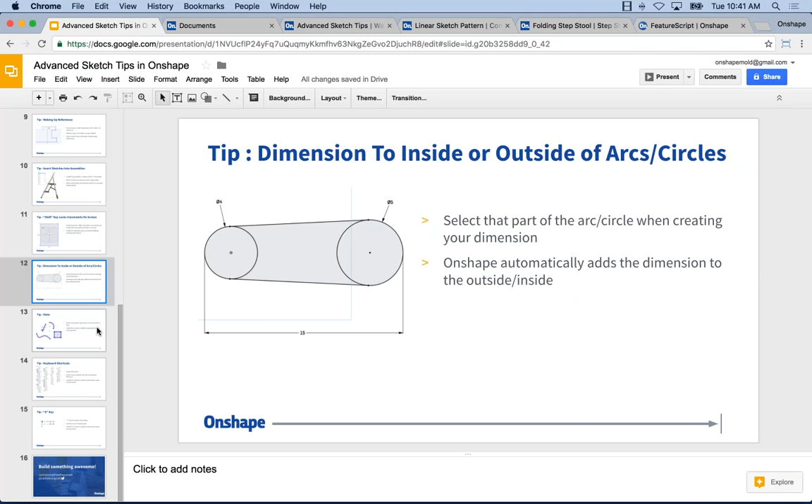All right, moving on. The next one in my list, we only have a few left, and this is slots. And this is something that a lot of users I still see constructing them manually, and you can do that. There's nothing wrong with doing that, but there is a dedicated command for doing this. And it works in a very similar way to offset, which I was showing you a second ago, but it gives you dedicated slot capabilities.

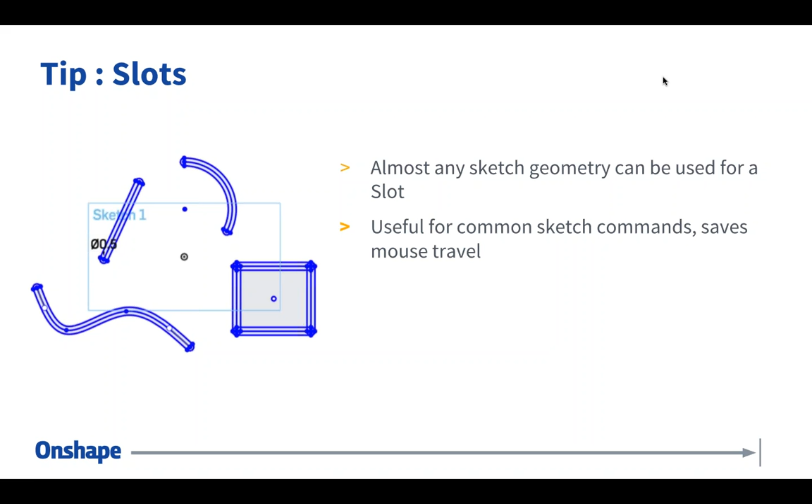It creates an arc on the ends. It offsets in both directions evenly. So it gives you that nice slot behavior. The things I want to stress is you can create a slot around almost any geometry: lines, arcs, no circles, I take that back, but arcs, rectangles, right? Because a rectangle is really just a series of lines. You're going to get an arc for each line, but even things like splines, you can create a slot around them. So jumping into it here, let's get into a few examples.

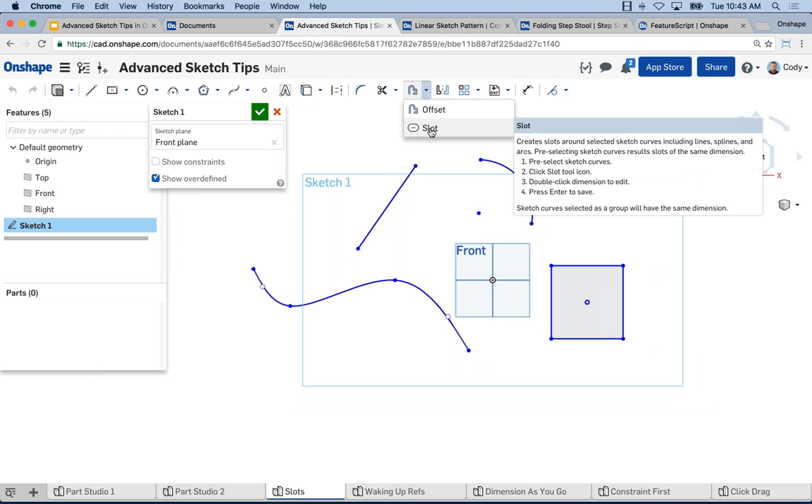So as I mentioned before, you can use almost anything as a reference. So here I have a line, a rectangle, an arc, and a spline. And I click the slot command. It's under the offset command in the toolbar. So I click slot, and then I just click on any geometry that I want to create a slot out of. So if this simple line is what I want, I left click, and now I have a slot around that line. I can double click the dimension.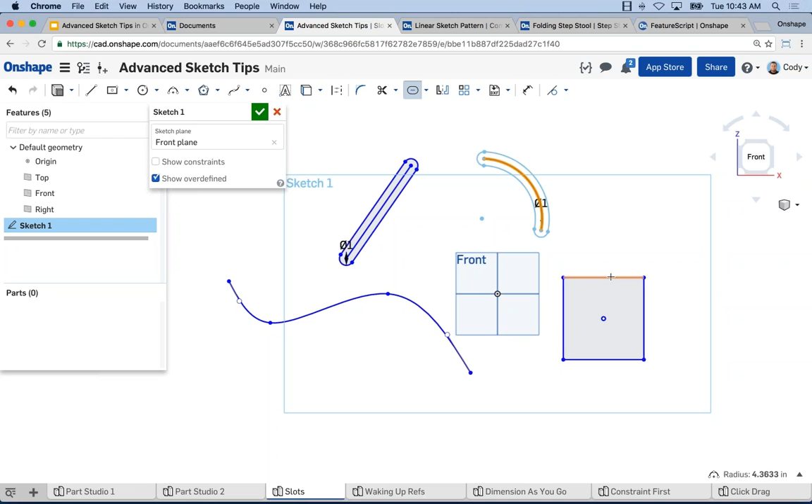Let's change this to 1 inch. Now I have a 1 inch slot around that. And I can keep going. So I can left click here, and there's a 1 inch slot. I can left click each line of this rectangle, for example, and create my slot around that. I can even use a spline as the reference for a slot. Okay. So just keep in mind you can use just about anything as a reference.

Now the question came earlier, I believe the question was, can I go in both directions using a center point to drive the slot?

And I don't believe there's going to be; it would be in the construction of the geometry that's referenced from the slot. And I think that the slot itself is really just offsetting what you already have. You could use a center point arc in an example like this and get something like that. So forgive me if I'm not giving you a total answer. I'm not 100% certain we can do exactly what you're looking for.

All right, so moving on, that is the slot command. Again, you'll find it under offset in the sketch toolbar, and you can use just about anything as a reference. So just left click the geometry, then we'll create a slot and prompt you for a value, double click the dimension, and you can change it. All right, next one.

What is an application for a slot? Well, any kind of slot you'd need to create. An example would be, I'm designing a vise and I need a slot where my bolt can slide back and forth so that it has the room to line up with a certain other part. So think of any scenario where you have a bolt that needs to slide along a certain amount of travel; that would be a good application for a slot.

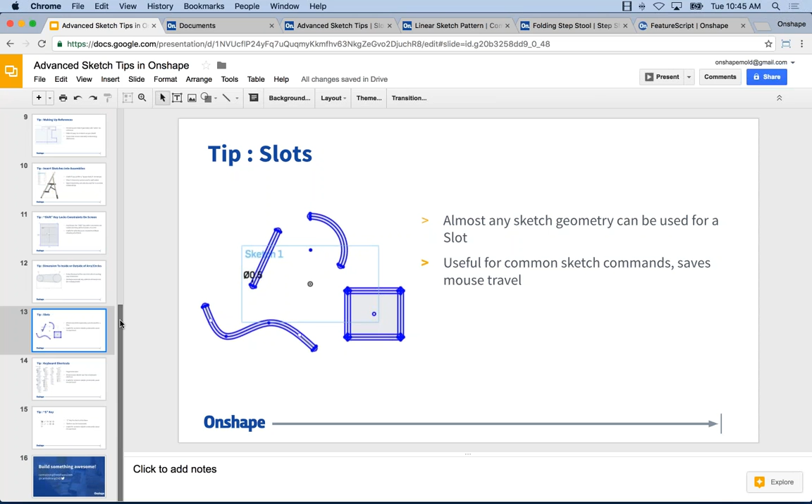All right, moving on. The last two that I have for you are really kind of the same, and they're both, I think, the biggest tips that I can give you, especially when we talk about sketching. The first is just the keyboard shortcuts. I can't stress this enough. I've given this tip a number of times, but if you're not using keyboard shortcuts, you really should be. It makes a huge difference. And if you're not using as many keyboard shortcuts as possible, you really should be, because there's a lot of things that you can do to save yourself some time.

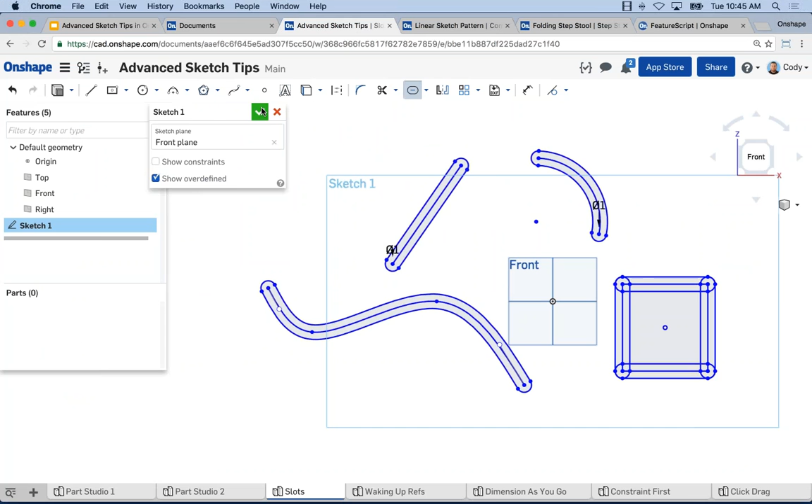So to give you a simple demo, I always like to show this because a lot of users can really miss out on an opportunity to save some time with these keyboard shortcuts. If I want a line, I type L, and now I'm sketching a line. If I want a construction line, I can hit Q, and now I'm sketching a construction line. I can click Q again, and now I'm back to a solid line. I can hit C, now I'm in a circle. I can hit R, now I'm in a rectangle. So I can go really quickly between commands.

I can add constraints quickly. Line, circle, T key, and now I have a tangent constraint. Line, circle, T key, there's another tangent constraint. I can go point, circle, I for coincident. So a big tip is all of the keyboard shortcuts. They make a big difference for creating the sketch geometry and also constraining it.

Now, a big tip, if you're interested in what the various constraints and their keyboard shortcuts are: just move your mouse over one of the constraints for a moment and leave it there, and you'll see a tooltip. You can see it says coincident and then I. If I move down, concentric, let's go to parallel, B. Tangent, T. So anything with a keyboard shortcut will show that shortcut in the flyout menu.

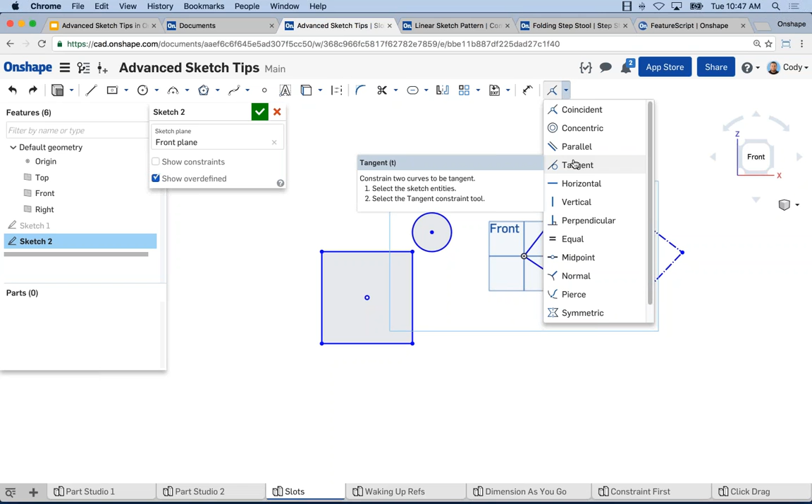Now, if you want to see all the keyboard shortcuts, you'll find them under the help menu. So help, keyboard shortcuts, and this is all of them, not just for sketching, but part studios, drawings, assemblies. So keyboard shortcuts are a tip you can use throughout Onshape. I think they're really valuable in sketching, especially as the user gets more advanced. The amount of time that you save is really big.

A commonly asked question: can you print the keyboard shortcuts or move them out to a separate window? Yes, if you click this arrow in the top right, it becomes a separate window in your browser, and you can print that, move it to a separate monitor, just about anything you'd like. You can right click and print it. So just keep in mind, keyboard shortcuts are probably one of my biggest tips for increasing the speed of your sketching. It's probably one of the single biggest things you can do to sketch faster.

All right, so moving on, my last tip, and this is a keyboard shortcut, but I think one that's a little bit different than the rest, and that is the S key on the keyboard. The S key on the keyboard will bring up what's called the shortcut toolbar. The shortcut toolbar appears at your cursor. So the neat thing is, this is essentially a toolbar that you can bring up at any moment, immediately wherever your cursor is. You don't have to go back up to the toolbar.

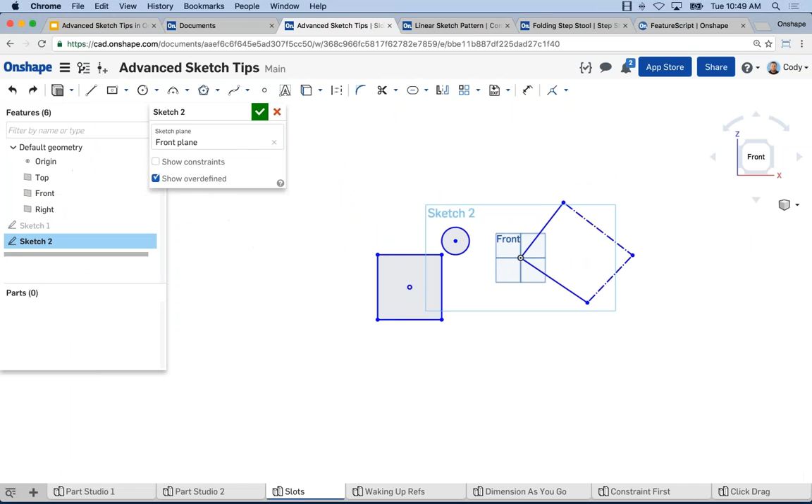All right, so let me give you a simple example of this. Let me jump into a sketch here. So I'm in a sketch. That's, of course, an important detail. I hit the S key. Now, my shortcut toolbar while in a sketch has extrude, a common command, but then I have lines, rectangles, circles, arcs, splines, convert entities, another common one, trim, dimension, the things you'd expect to see.

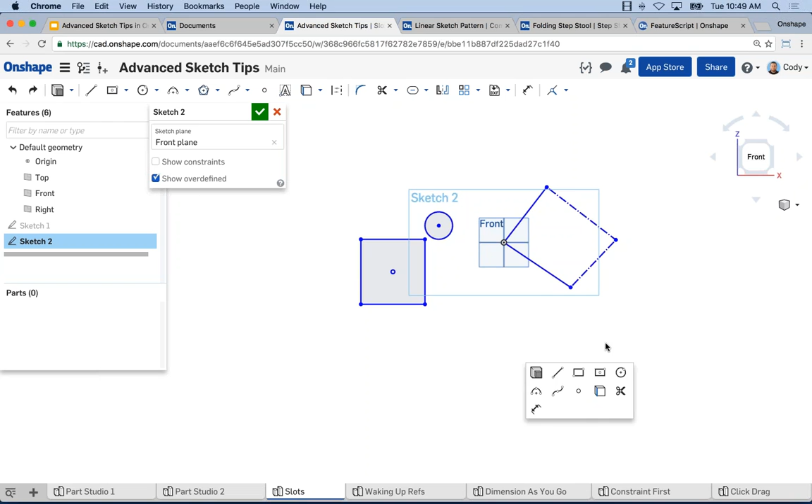So again, anywhere I'm at, if I'm in here sketching, I hit S, there's my toolbar, right? And if I'm over here, S, it pops up wherever my cursor is. So I don't have to go back and forth. Now, the big thing with this is just saving you the mouse travel, but inevitably the user ends up asking, how do I customize this? How do I change what's in this toolbar?

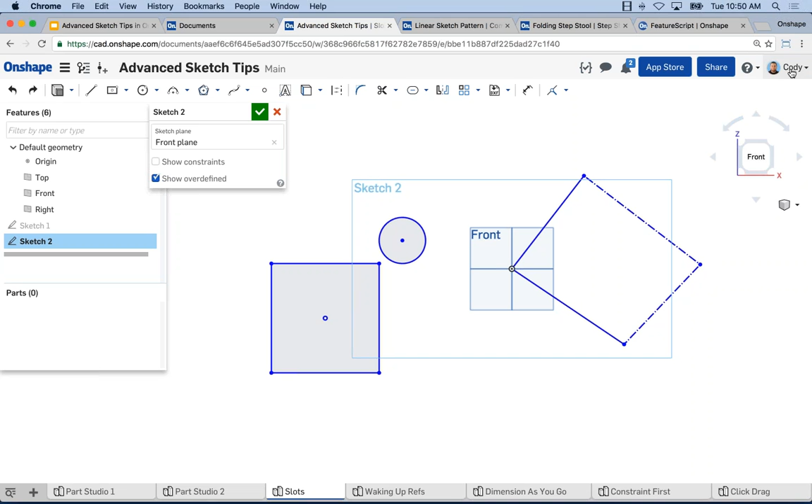And you could do that under your preferences. So under Manage Account Preferences. So in the top right corner, you have your username. If you click Manage Account, go to Preferences, you'll find all of your preferences. And this is more than just the toolbar. It's view manipulation, it's reversing scroll direction, all those kinds of high level settings that you may want to control.

If I scroll down a bit, I can see shortcut toolbars and, more importantly, sketch. So here I can scroll through. Let's say that I'm always creating an ellipse. I can check ellipse, and now I've added the ellipse to my shortcut toolbar, and now I can get to it really quickly. One last thing I want to mention, make sure to click Save Shortcut Toolbar Settings before you go back into your document.

But that's my last tip for you. Definitely a big one if you are a fan of keyboard shortcuts. The S key is a really, really useful keyboard shortcut.